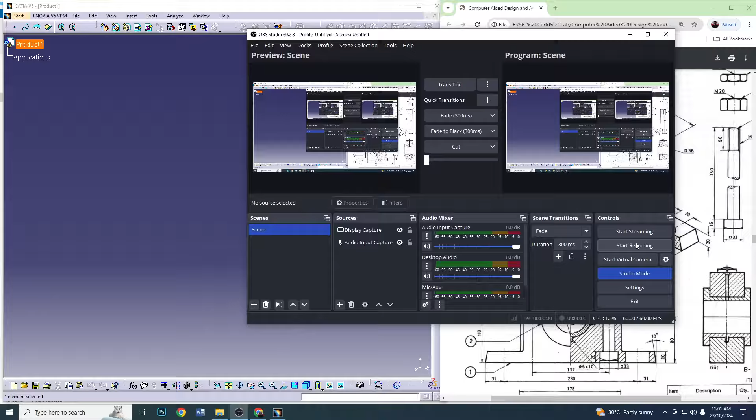So in this video, we'll be doing the assembly of a plummer block. This is a plummer block. The plummer block will have the following components.

We have got a block here. This is the part called the block. This is the isometric view and this is the front view. So this is the block here. This is the first part.

And then we have got a cover. This is the cover, and between the block and the cover there is a 3 millimeter clearance being provided.

Then we have got a brass bottom and brass top here. So two components are here, and the assembly will be done using a square headed bolt, two square headed bolts which will go through here, and completed by a normal hexagonal nut as well as a locking nut. So these are the different parts that are there.

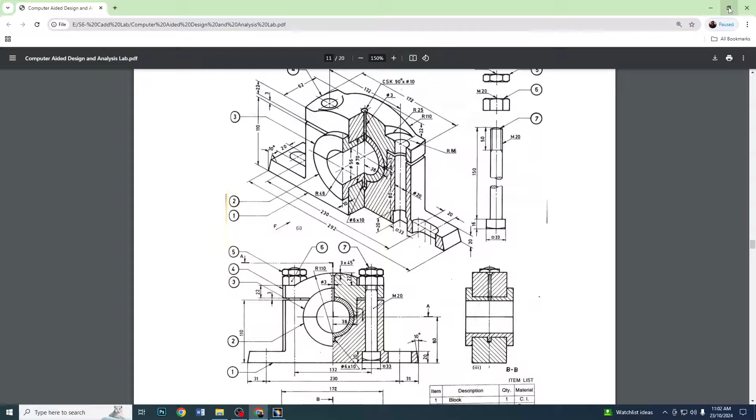So we'll do the assembly using Catia. In order to do that, first we'll open Catia.

Yeah, just a little bit.

So this is the product tree. We don't need the product environment here. So I'll close this one and we'll start mechanical design, part design.

And the first part that I'm going to create is the block here. So type block and give OK.

What I'll do is that I'll draw the front view and then I'll pad it over a distance of 62 millimeter. That's what I'm going to do.

Since the front view is symmetric across this particular axis, I'll draw one side of the block here and then I'll mirror it. So I'll first select this sketch.

And draw the profile. So the profile, I have got a vertical, an inclined line, another vertical, a horizontal, sorry, I've got a horizontal here, an inclined line, another horizontal, horizontal, vertical, and a horizontal, and an arc of radius 35 millimeters. So this is what I'm going to draw.

First I'll draw the horizontal, an inclined line, another horizontal, a vertical, horizontal, vertical, and another horizontal. First I'll dimension this and then I'll go with

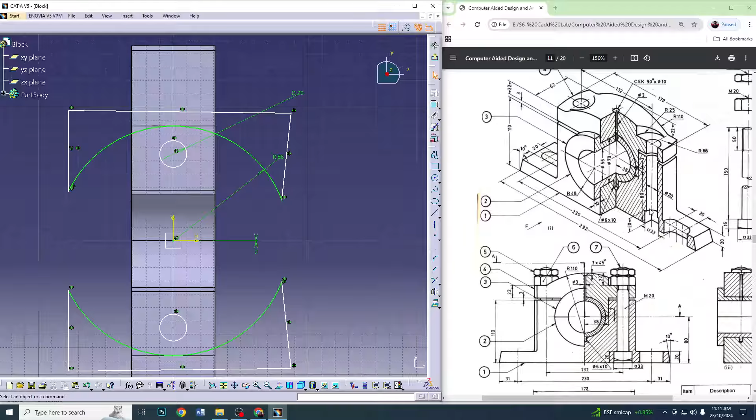And what is the distance to which I need to pocket? So 110 is this entire length, but both of them should end here up to this space, that is minus 20 millimeters. So I'm exiting the workbench, giving a pocket. So that is 110 minus 20, that is exactly 90 millimeters.

So up to 90 millimeter, if you see, you have this curvature being mentioned. Now we need to create this particular geometry, that is the ellipse as well as the circle.

The circle center has not been defined, I guess. The circle center distance should be... it was not mentioned earlier in the drawing. I'll go to that particular sketch and edit it.

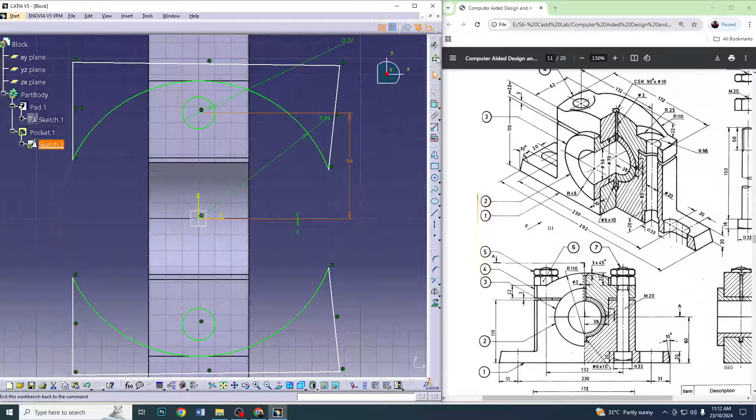The circle center to center distance is 132 from the center. Center to center distance is 132. So this is 132 by 2. So now it is properly done. So now we have it.

Okay, now we'll draw this elliptical or long keyhole as well as the square headed hole in the block. So we'll select this particular face for sketching, and when we expand the rectangular section, we have this elliptical hole here. The dimension of the elliptical hole is 20 in length and 20 in diameter.

So this is 20, and the diameter is 20, so the radius is 10, and from this point to this point, the distance up to here is given as 230 by 2, that is 115. So from the center to here, 115 minus 10, that is 105. So 105 is being mentioned here.

Now I need a square cut here of 33 dimension. So the square is 33 by 33, and then we need to extend it up to 20 millimeter downwards, and the center of that square is at a distance of 132 by 2, that is 66 from the center.

So in order to get all these dimensions, I'll select a centered rectangle, and I'll dimension this as 33 by 33. Here a constraint was developed, so that is why it is showing this constraint, I'm deleting it.

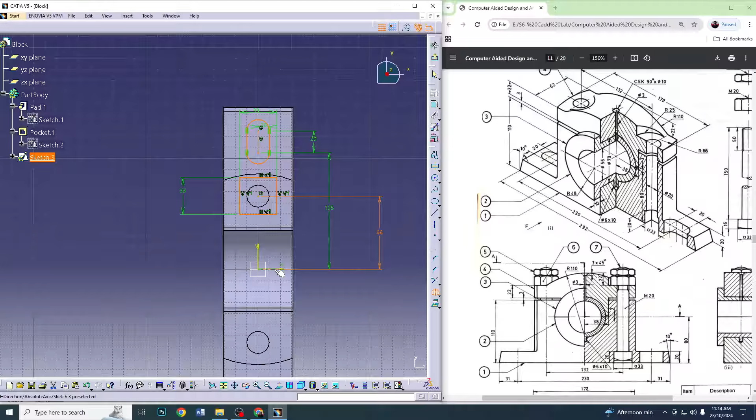Now I'm going to mirror these two profiles with respect to the horizontal axis, exiting the workbench, and I need to pocket it. So pocket it downwards to 20 millimeter or up to last.

So I have all the main geometries done correctly here. Now two finishing works need to be done. The first one is we have got an edge fillet here, so I need to fillet this edge. I'll give just 5 millimeters here, an edge fillet of 5 millimeters, arbitrarily taken, is being done.

There is one more thing here, we need to create a slot, a hole. So in order to do that, I'll select this particular sketch again, and I'll draw just the section here and try to rotate it to create a hole. I'll use a profile tool. I know the geometry is on the center, so I've got this profile here.

The diameter is given as 6 millimeters, so I'll take the radius, that is 3 millimeters here.

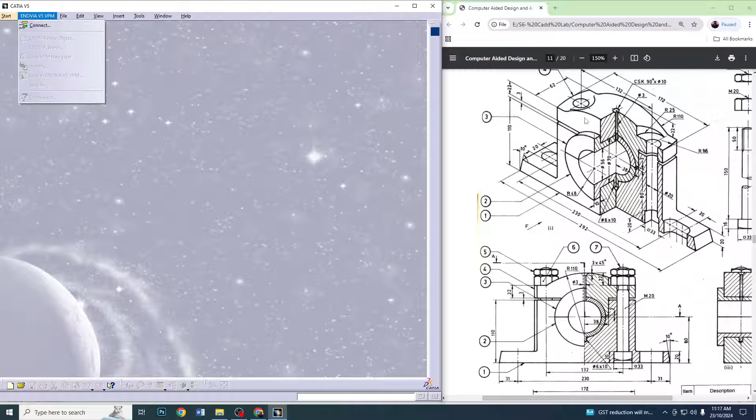Now next we need to create, first we'll create this particular cover here. So start mechanical design, part design, and I create cover. Now again a similar procedure will be done in order to create the cover.

So select this sketch. What I'll do is, we have got the origin here, so in my sketch this origin will be the center of the arc. And this edge, mind it, this edge is a little bit above this particular line, so that edge will be above the horizontal axis, and that distance is mentioned as 3 millimeters.

So first I'll draw the profile here. You will be having a horizontal, a vertical, a horizontal, a vertical, then a horizontal, and from here you will be having an arc of radius 110 millimeters. So this is what we are going to do.

I'll use the profile tool and draw horizontal first, this horizontal, a little bit above the edge line. So horizontal, then a vertical, horizontal, vertical, finally a horizontal.

First I'll just mention these dimensions. So from here to here, the length is 172 by 2, and from here to here, 38. And now for the time being we are not giving any constraint, but this distance we have, this ends at 132 by 2.

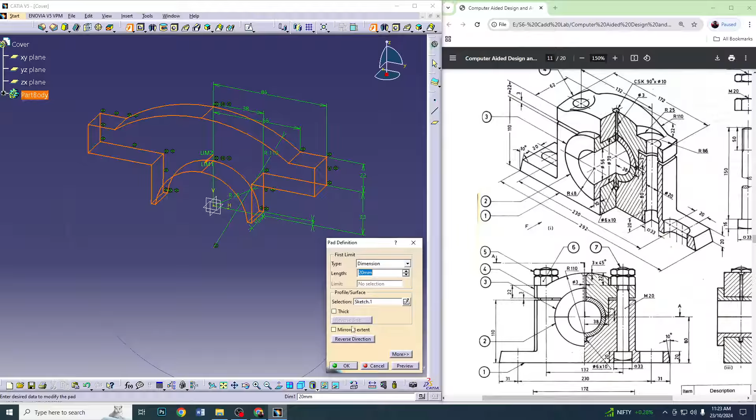Now we have got the shape almost here, and we need to pad it over a mirrored extent of 31 millimeter to both sides. Now we have the draft sketch here.

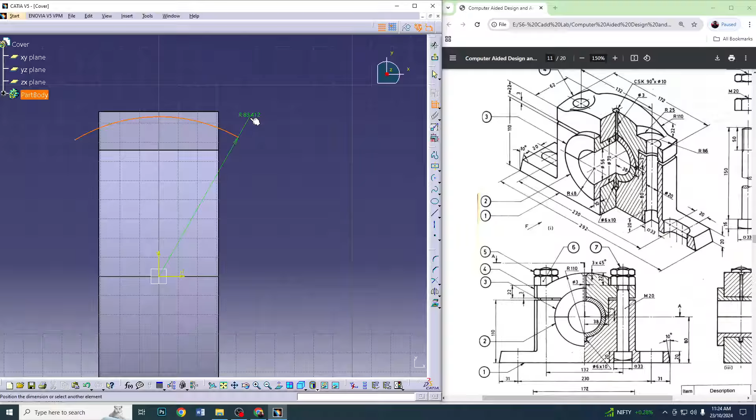Now we'll select this particular face in order to draw this arc as well as this hole. So again, center point arc here. From here, the radius is 86. We'll complete it using

and then we need to create a circle also for the hole, centered along this line. The diameter is 20 millimeter, and it's at a distance of 132 by 2, that is 66 from the horizontal.

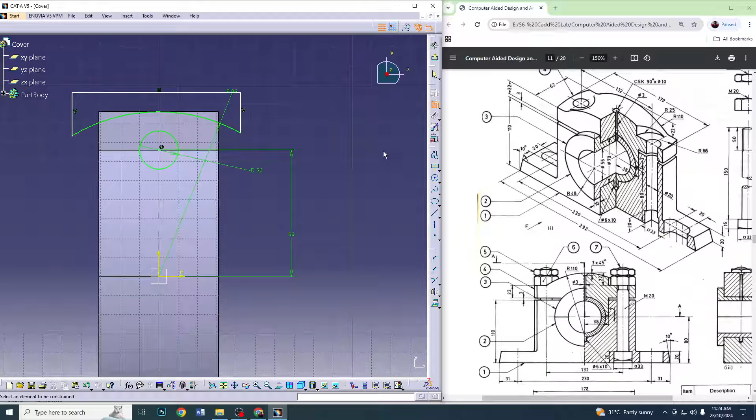Okay, so now we have got these two here. Now we'll mirror it with respect to horizontal. Now I'll pocket it and give mirrored extent so that we have this here. Now if you can see this, there is a...

The hole is being generated this to this particular curved edge. So in order to change that, or in order to accommodate for the nuts, we need to cut a hole here.

So again, I'll select that particular sketch itself, and I'll select a center point arc where the radius is 25, being mentioned here, this one, and with the same center as the hole.

So just select an arc, or I'll do a circle itself, doesn't matter now, and the radius is 25, and this is at a distance of again 132 by 2, that is 66 from the center.

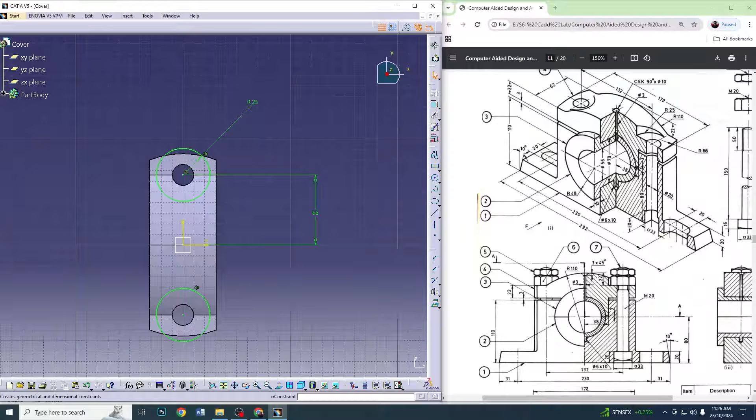So here we have it, and mirror it with respect to horizontal, and now I'll pocket it in the reverse direction. So we have this part here, and now there is one more thing that is pending here, and that is

this hole. This hole I need to create. So in order to create that particular hole, what I'll do, I'll select again this plane itself, and give sketch. Now I'll use the profile tool,

I'll draw just one half of it. And the dimension, there is 90-degree being mentioned here. That means that this edge to this edge makes 90-degree between each other. And diameter of 10 is given.

So I'll go for dimensioning now. From here to here, it should be the radius, that is 5 millimeter. And this makes an angle of 45. So that makes it 45 plus 45, 90 degrees on both sides.

And now its length needs to be mentioned. So this should exactly coincide with this here. So in order to do that,

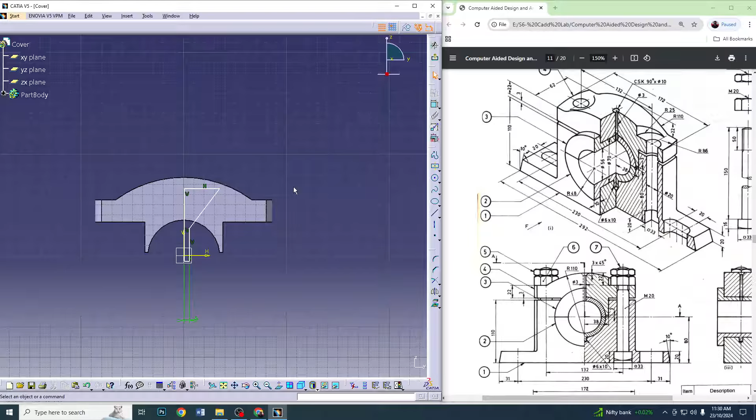What is this? Now, I think some dimensions have gone wrong now. Oh sorry, we need it to be here, right? So what we'll do is project this 3D element, that's a better way to do it. Project this one, make this coincide.

And this angle should be 45 degrees.

Oh actually this diameter is 3 millimeter. Oh here it is 10 millimeter. This is 10 millimeter. This is actually 1.5, and this is 5. That's how it goes.

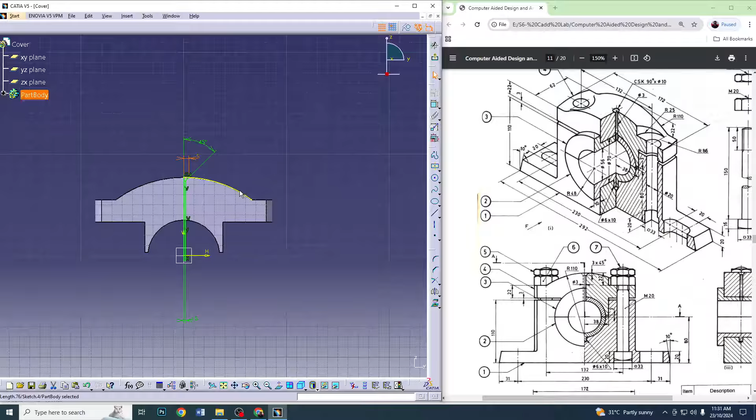Okay, now we have the hole here. So 45, 5. Automatically it will come down to this. We can delete this one.

And exiting the workbench, I think there is an open profile. Let's see, we'll try to groove it with the vertical, and we get this vertical. So that being done, our cover is complete. So file, save as cover.

Now next we'll create this particular brass bottom and brass top. So what I'll do is create the entire part and cut in order to create the bottom and top. So part design, brass bottom.

So I can create this using a series of circles and then editing, or I can create using a shaft tool. I'll create using circles here. So go for sketch, I need to create the circles. First I'll create this one. So the inner diameter is 56 and outer diameter is 70.

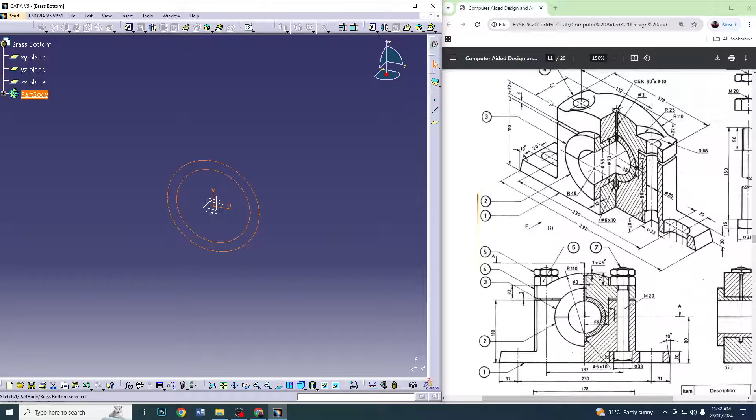Inner diameter 56 and the outer diameter is 70, and this goes for a length of 62 millimeter. So I'm going to pad it, mirrored extent, give this as 31 millimeter.

So again I'm going to select this face here, and I'm going to create this particular projection here of 10 millimeter, and the radius is 48. So I need to create two circles here also. One, two.

The first one corresponds to the hole, that is 56 diameter, and the second one with a radius of 48. So exiting the workbench, and I can pad it outside for a dimension of 10 millimeter.

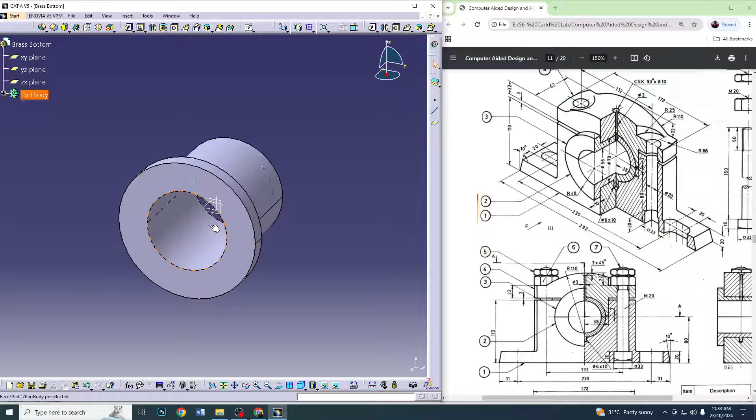A similar profile is required on the reverse side also. So what I'll do is use the mirror tool instead of drawing. So part, I need to mirror this particular projection, so that is pad 2, and I'll use this mirror with respect to this plane.

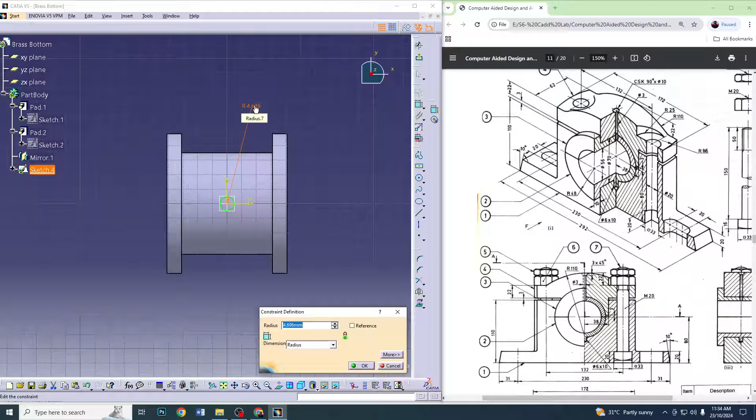Now I've got my part here, and I need to create this particular hole here. So in order to create that hole, select this plane and sketch. Just create a hole of radius 1.5 or diameter 3. Exit it, and I'll pocket it

to last. I have my hole here, and I need to create this projection shaft here. So for that I'll select this particular plane, and I need to create a shaft here.

You can use the user profile or rectangle, and this diameter is 6 millimeter over a length of 10 millimeter. So going to dimension this. So radius should be 3 millimeter, and the height should be 10 millimeter, and it should start from exactly here.

So exactly here means at a distance of 35 millimeter. Here to here, the distance should be 35 millimeter. And so instead of this 10, what I'll do is make the dimension from here to here as 45, and I'll extend this a little bit further.

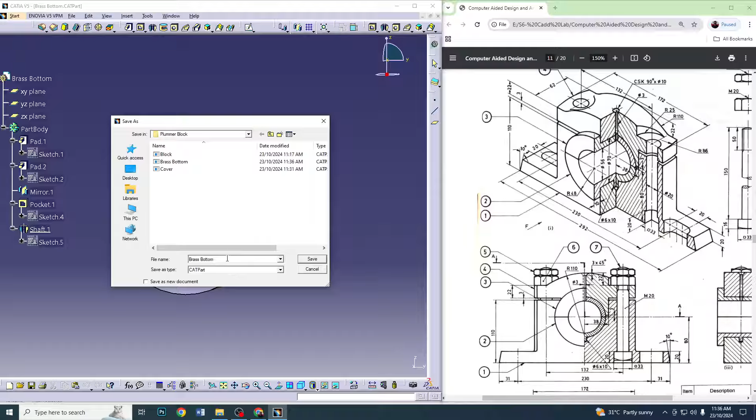Now this is the brass. Now I need to create brass top and brass bottom. So I'll first select this as brass bottom, and the same file I'll use to rename it for brass top, and I'll do the editing here. So now this is brass top.

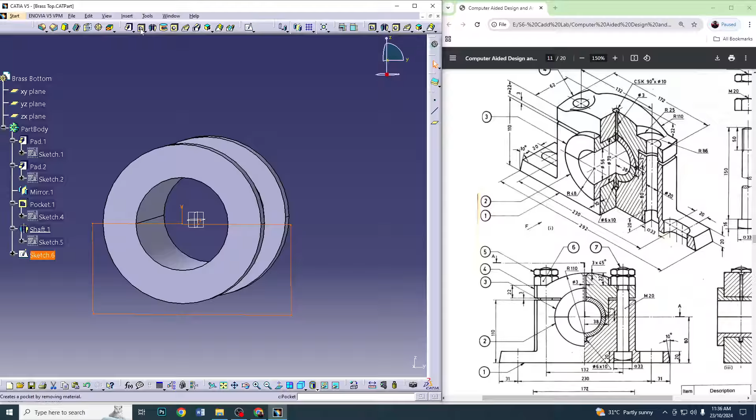So what I'll do is select this particular face. I'll create a rectangle. So this is brass top, right? So I'll create a big rectangle, and I'll pocket it up to last, so that I'll create this brass top here. I'll save this one. Now I'll go to my folder and create, select brass bottom.

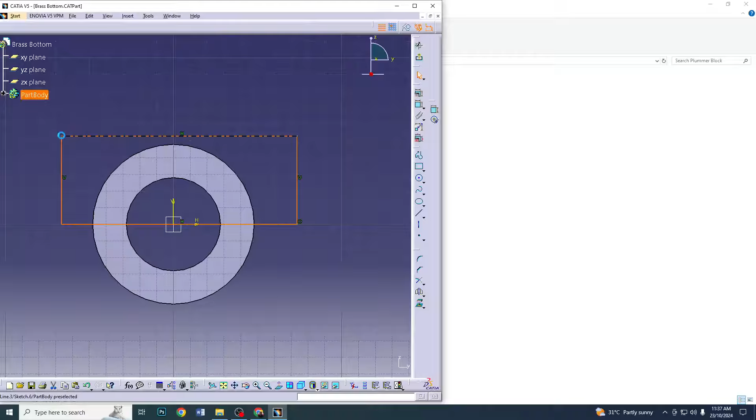Plummer block, brass bottom here. So I'll select this one using a rectangle. I'm going to remove the top part. File, save. Now I've got my brass bottom and brass top part being created here. Now I need to create this particular nut.

So I need to create this particular nut here. I'm going to start mechanical design, part design, and square-headed bolt. So I need to create the bolt here. Nut we already have, so the bolt we need to create.

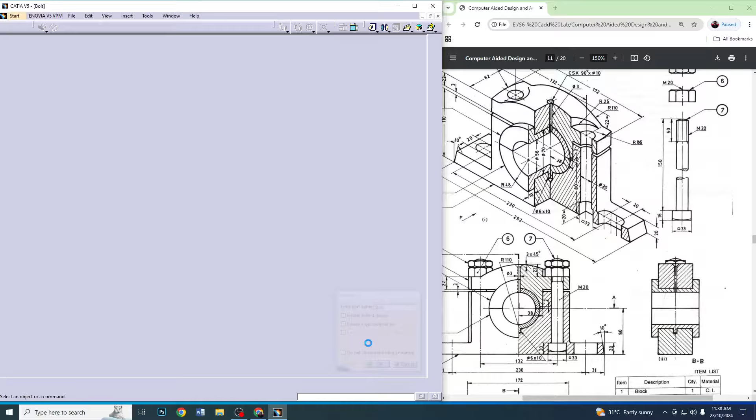So select this sketch, create a center point rectangle, and since this is M20 and the dimension is the square of 33 in cross section, 16 height, first give those dimensions. So 33 by 33, and I'll pad it over a length of 16 millimeter. Select this face again, sketch it.

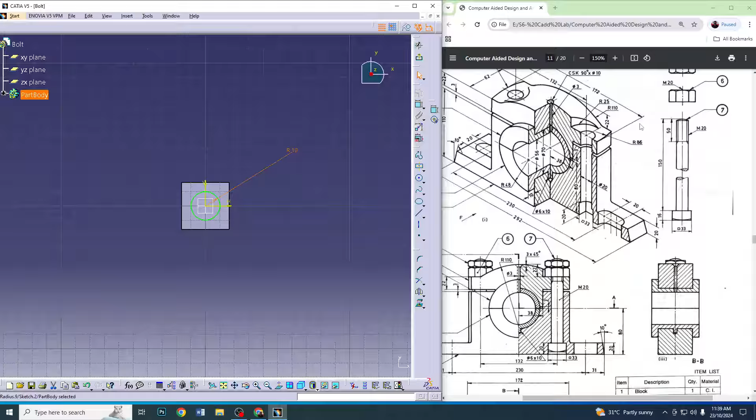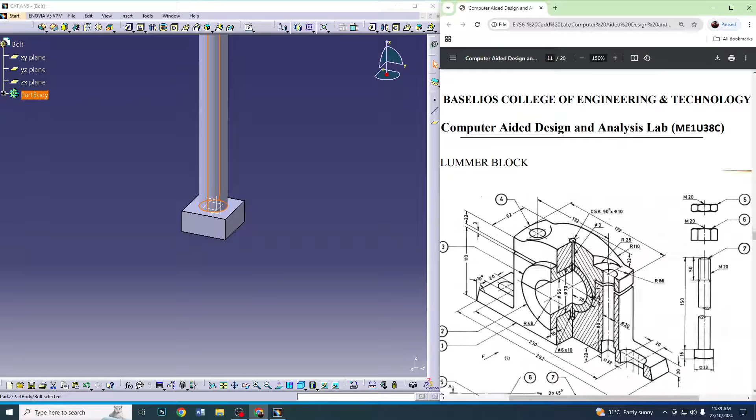M20, so 20, I'm going to create it on a plane. So radius is 10, and I'm going to pad it over a total length of 150. Sorry. So file, save as, bolt, and all our parts are complete.

Now we'll do the assembly. So I'll start mechanical design, assembly design, and in our product tree, I'll call one by one. So first, I'll call the block. So the block is here. Now the first thing to do is select the block and fix it.

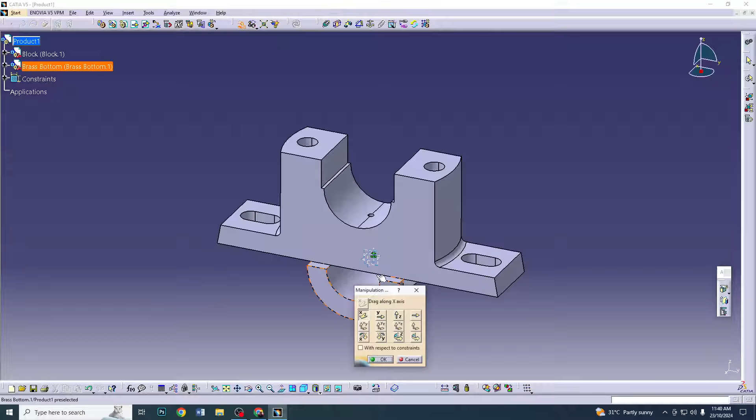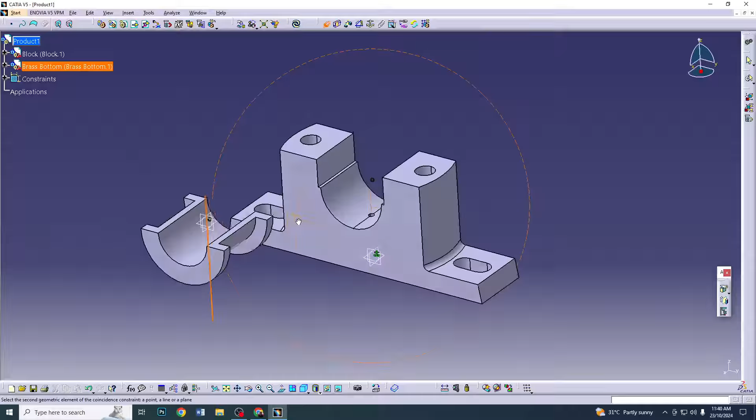Next, I'll call the brass bottom. So brass bottom is here. First, I'll manipulate this to bring it a little bit outside so that we can see what is being done. So here it's pretty simple. I need to coincide between this and this axis, and I need to make coincide again between this projection and this particular hole, and these are the two things that I require.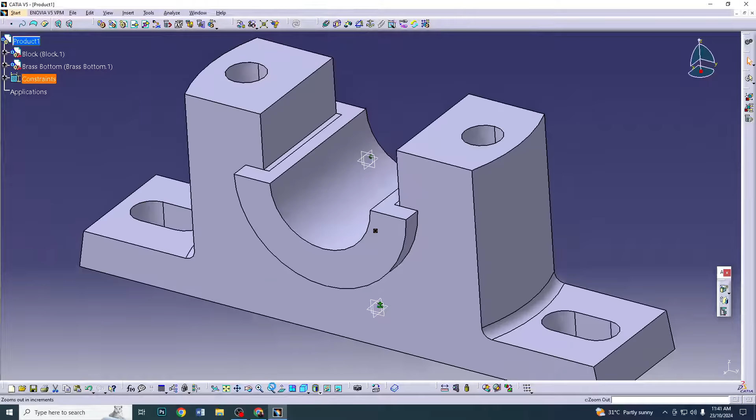So once I give it, it is perfectly fit. No more surface constraints are required here. So brass bottom is there. Now I'll call brass top.

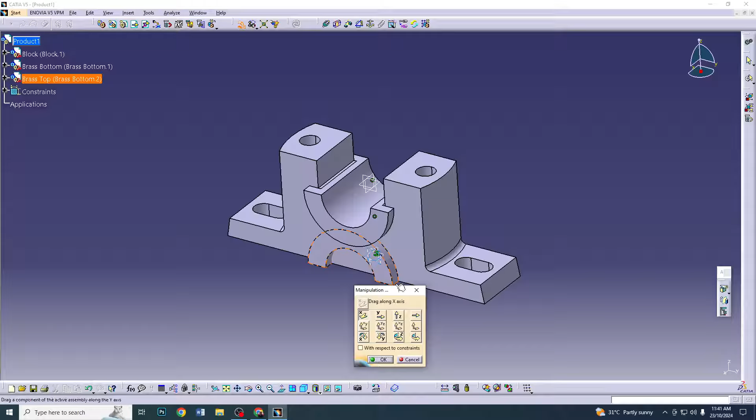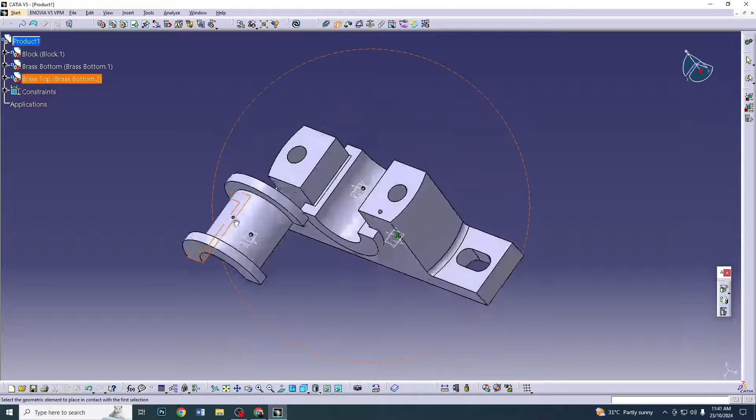So brass top again, we need to do there, since we created it from the same drawing. So brass top is here. I'll bring it outside first. So what we need to do is build the coincide constraint between this and this surface, and then finally a surface constraint between this face and this face. Once I give update here, now I need to insert it properly.

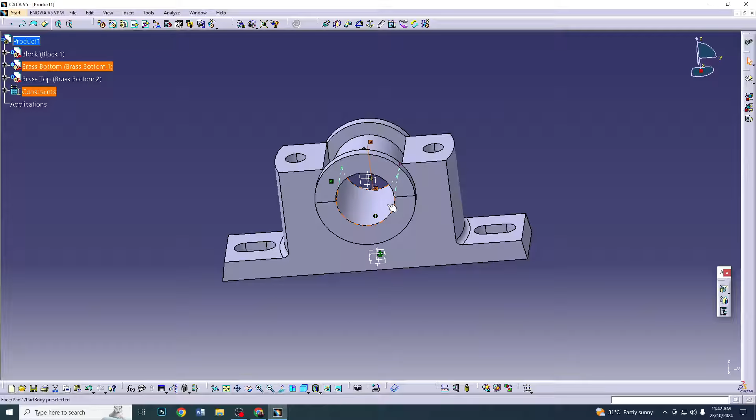So again another surface constraint between here, say this space. So now it's perfectly being fit here. Now the next part is the cover.

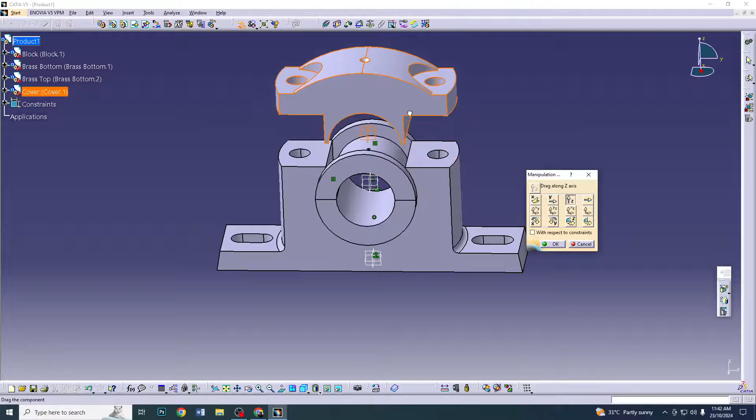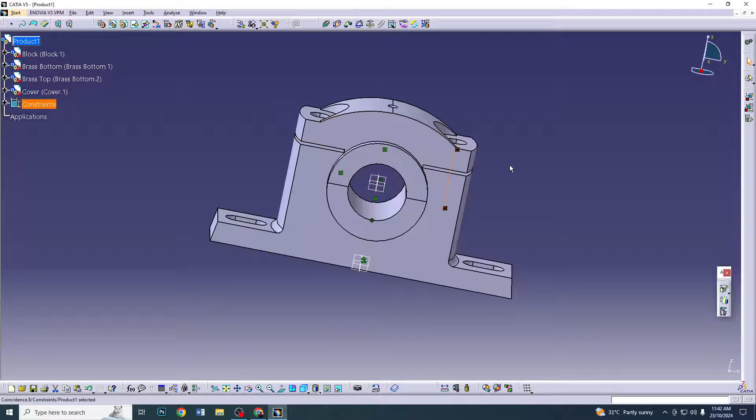So cover is there, here is the cover. I'll manipulate this along the Z axis. Cover is here. Now I need to give a coincide constraint between this axis and this axis. Again a coincident constraint between here and here, and we update it. So 3 millimeter clearance will automatically come, or we can mention it separately, but it should automatically come when we give these two constraints.

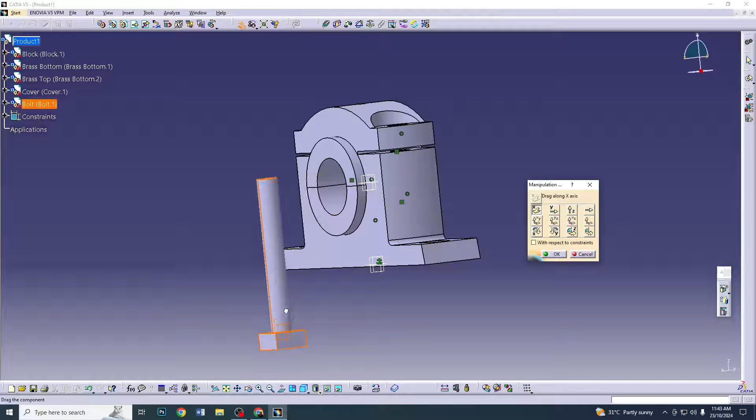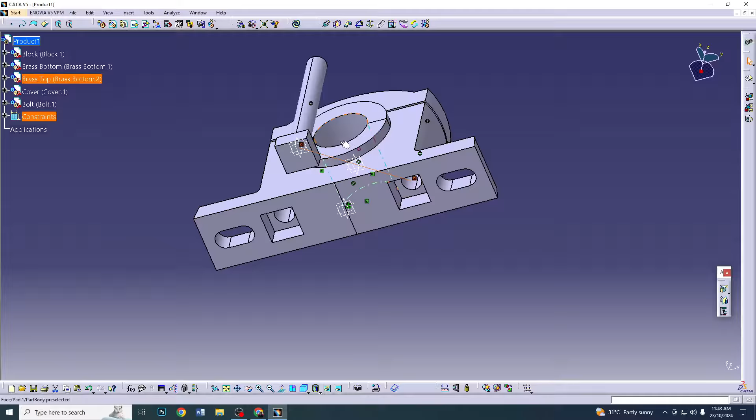Okay, and now we need to call upon the bolt here. So the bolt is here. Take it outside first. Now we need to insert this bolt. So a constraint between here and here, and we need to give the two edges, this surface to this surface in contact, and maybe a perpendicular surface constraint should be given. It's perfectly fit here.

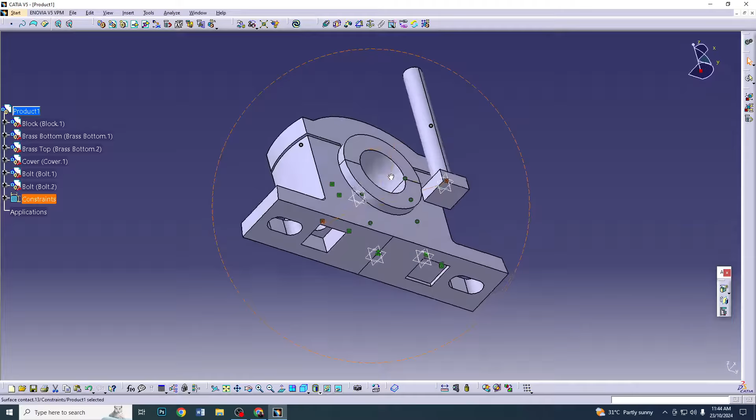Similarly, I'll call another bolt again, take it outside as done previously, and give the constraints similar to what we have given earlier. And update, and it's all there.

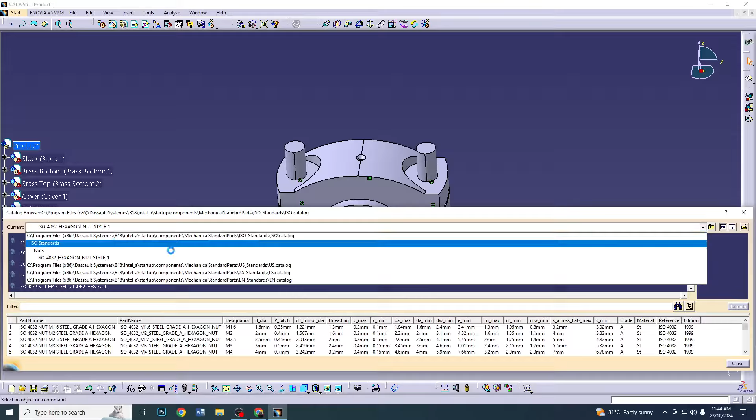Now finally we need to insert the two nuts. So I'll open the catalog browser. I'll go for the ISO catalog. So we have got nuts here. First is hexagon nut style 1 we can select. And we need M20 nut, so we need two such nuts. The nuts are here now.

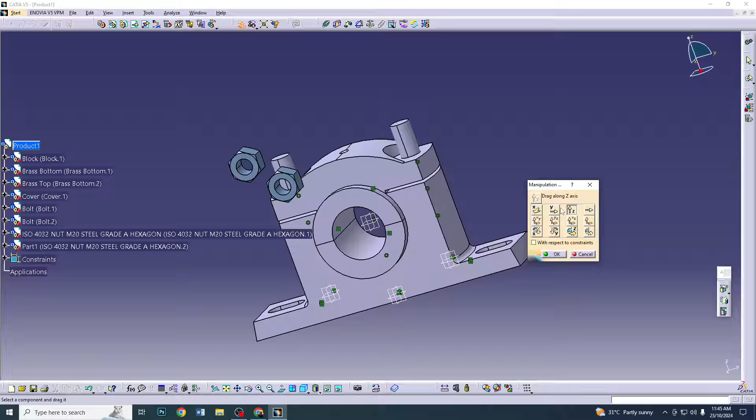So I'll take it outside. Just place it, it's convenient for me to assemble. First need to create the constraints, coincident and the surface constraint. Same thing I need to do here also, for the other nut. So the nuts are being inserted.

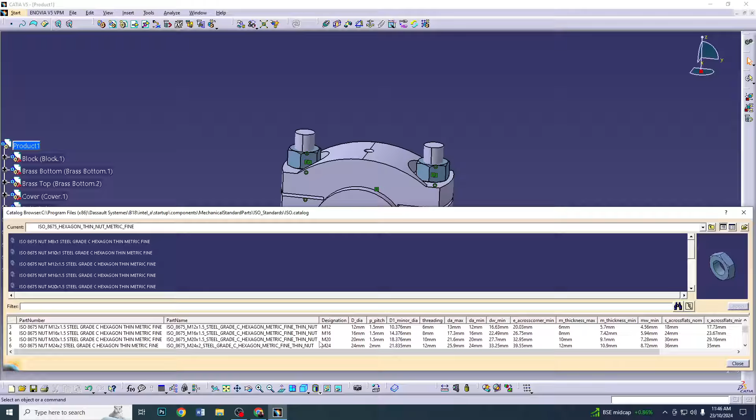Now I need to call upon the locking nut. Again, catalog browser. You need to go down here, downwards. You can see the nut, thin nut, metric fine will do. So it's an M20 that I require. So 1, 2, we have got two M20s here. And I'll take it outside first, and manipulate.

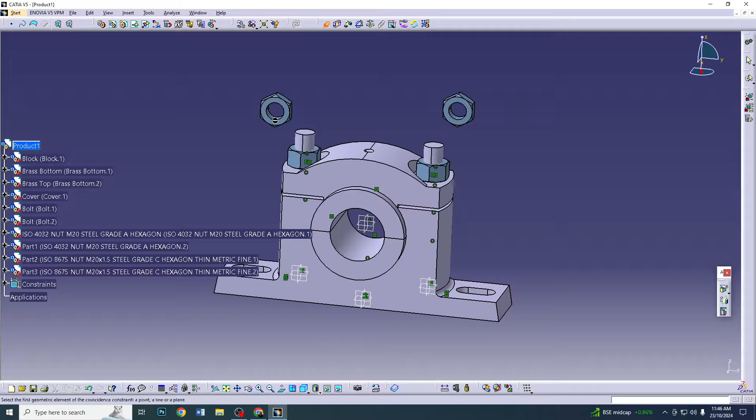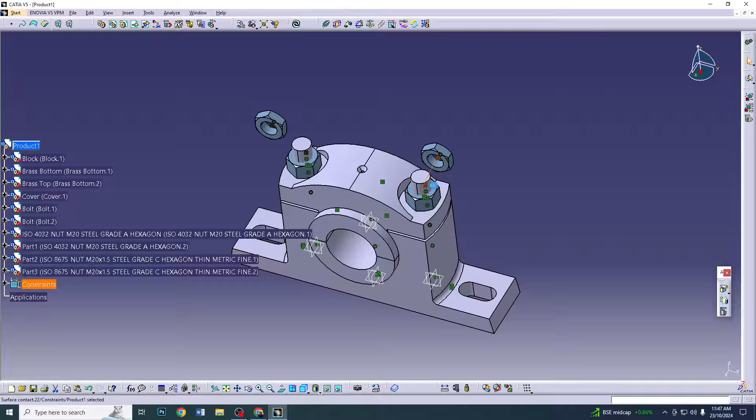Coincident constraint, and another vertical constraint between this and this, surface constraint between this space and this space, surface constraint between this space. Give an update, and you have got your plumber block assembly completed.

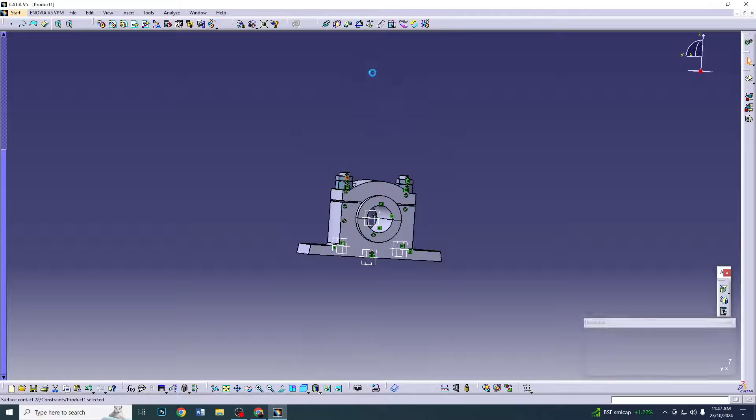Now we can try exploding it, and once you update, you can see it all here. This is the various views here, different side, top views, with the isometric view here.

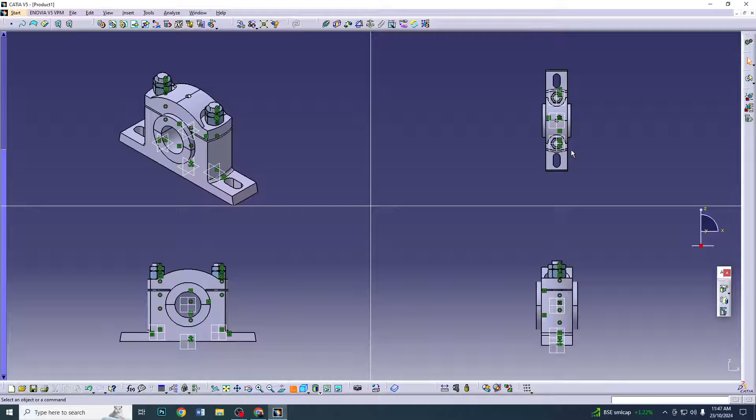This is the plummer block assembly.